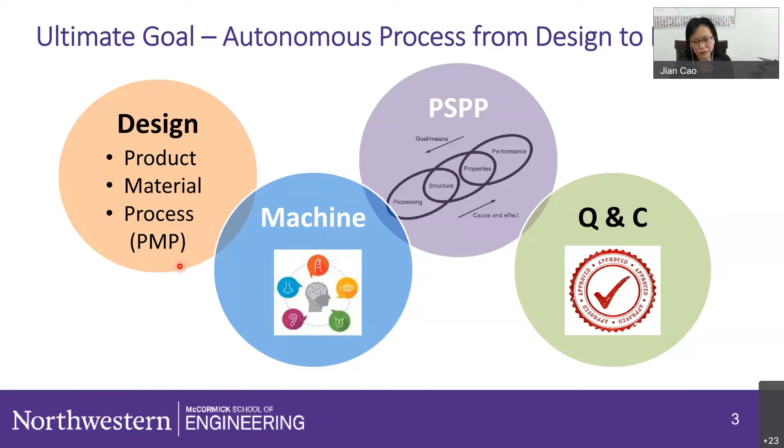As mechanical engineers, we add the machine component, because we want to be able to control the process well, so we need to understand that. That's why we want to have our own machine with open architecture, so we can tweak and measure every possible part. Ultimately, you also want to have a design—here we are thinking about integrating the design of the product, process, and material together, which is really challenging because of computational cost, and this is where machine learning starts to come into play, so you'll hear some of that. And then, finally, you need to know how to qualify and certify the part you made.

Overall, when you connect all these things together, it's through the simulation and data. So today I'm going to give you a glance about what we have been doing.

Starting with the machine, this is our own homemade DED machine, we call it ARPI. Basically you have the laser power, and then you have the coaxial nozzles for powder depositions coming in, and you monitor it with the infrared camera, as well as different hoppers, so we can control the powder flow rate, and also the environmental chamber, so we can process materials that are probably a little bit more reactive.

I'm not going to go through the application of the DED, because at this point I think people are probably pretty well associated with those processes. What's new is actually the first installation.

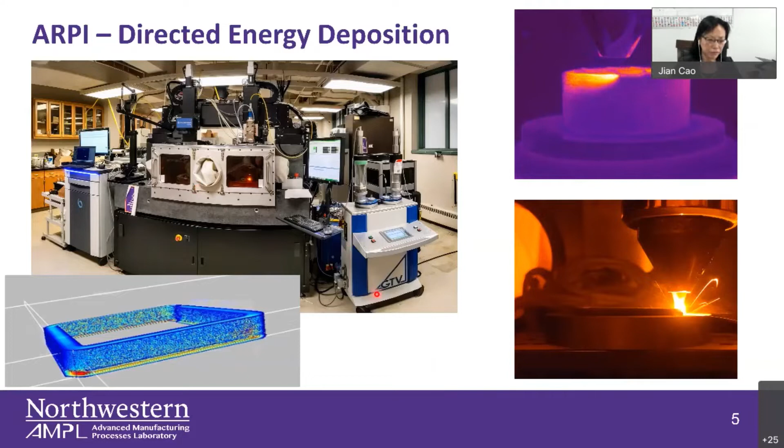The in-situ monitor is called a high-speed spectrometer, it's the Sigma Labs system, right here. That's the first installation for DED worldwide. So I'm going to show you something in terms of what this can do.

Basically, when you look at the high-speed spectrometer, it has very high data acquisition, 100 kilohertz. It can measure intensity, and also two-color pyrometers, so you can measure the true temperature.

So here, for example, I'll give you a glance about what you can see. If you want to make an airfoil, you can see the intensity as well as the melt temperature measurement coming out from the top.

The nice thing about this is really the high resolution in terms of both temporal and spatial resolution. Spatial resolution, you can go down to 6 micron fine details. Compare that with the IR camera, you won't be able to have this kind of 100 kilohertz rate.

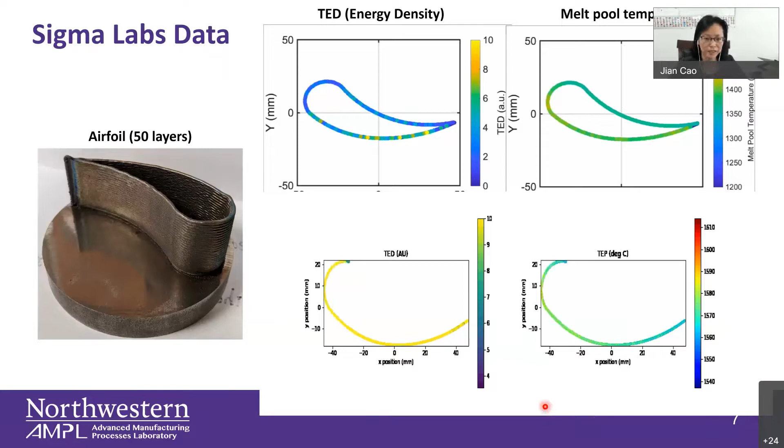What we are trying to do is utilize this to understand the process, material properties, as well as try to control that. The other thing we have been doing is also understanding how the porosity actually formed in the DED, and meanwhile, trying to control the porosity.

This is the X-ray imaging, high-speed X-ray imaging, and the frequency here is 80 kilohertz. Because of different density from the powders, fluids, and solids, you can see the boundary right here, the melt pool.

X-ray is looking here in this direction, the green direction. You can see that this is a really, really violent process, you can see the powder coming down, flowing out.

The porosity was also coming from the powder itself, as well as lack of fusion, or other kinds of mechanisms.

I'm not going to talk too much about this, but the key point that we have found in the past is that the solidification rate also determines the porosity shape and distribution quite significantly.

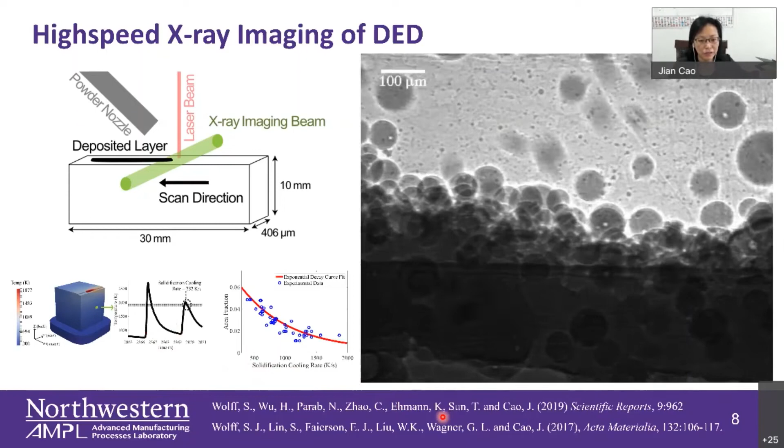So let me talk about the PSPP part. I mentioned about the machine, and when you look at this, we know the thermal history really determines the microstructure and therefore determines the mechanical properties.

Here you can see the image, our image, we are making a kind of metal wafer. You can see the internal structures right there.

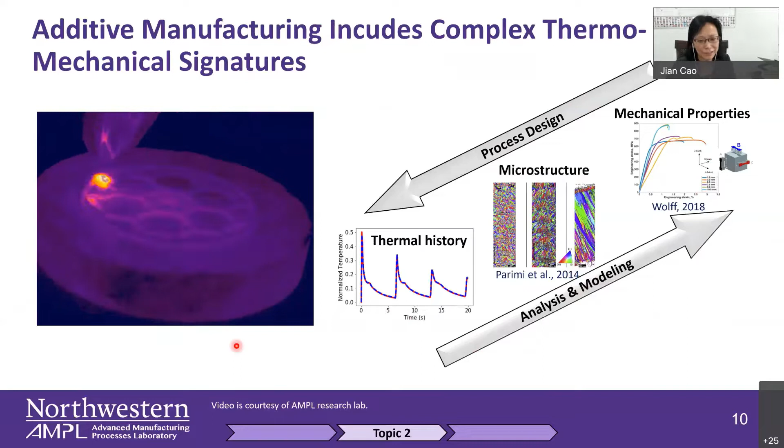But the key point that we want to do is to see how we can control the properties. So you have the nozzle coming down the wall, and one of the first works that we have done is basically looking at the IR camera.

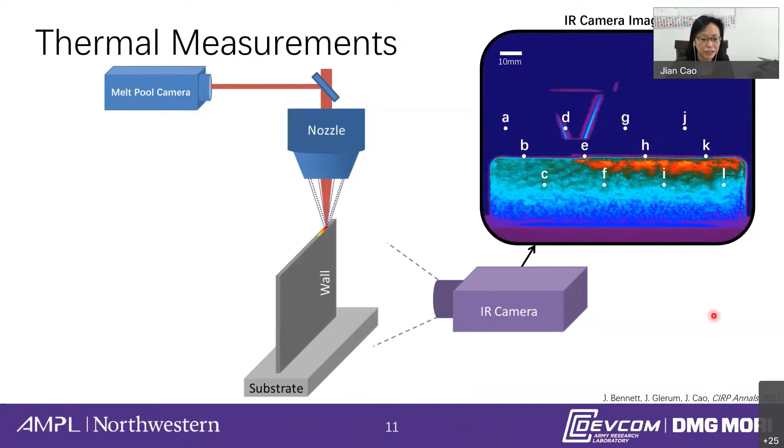And then you can take out, cut the samples from the single wall, and also look at the correlation.

So that setup is relatively easy, and you can see the temperature readings at different points.

As you build up, you can also see that the top ones, which are the red ones, actually, even though you use the same laser power, because of the heat accumulation through the build, you're going to have overall higher temperature.

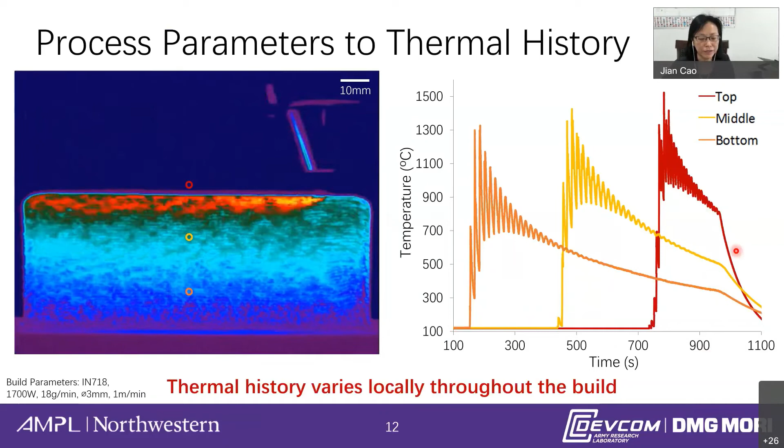For this one, we actually did four different walls, in collaboration with DMG Mori: an 80 millimeter wall and a wide wall, and also the wide wall with the melt pool control from the top.

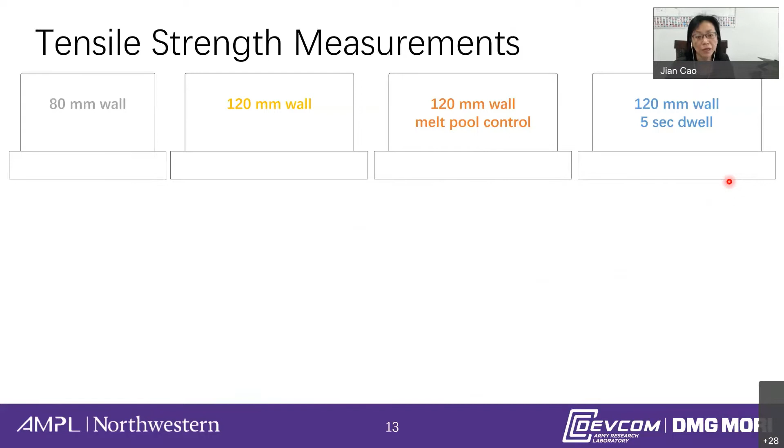For this one, you are changing the laser power, trying to control the melt pool size by looking just from the top. You also have the dwell time, certainly trying to homogenize the temperature distribution through the build by giving a little bit of dwell time after each layer.

So you do the tensile test. That's easy, just takes time.

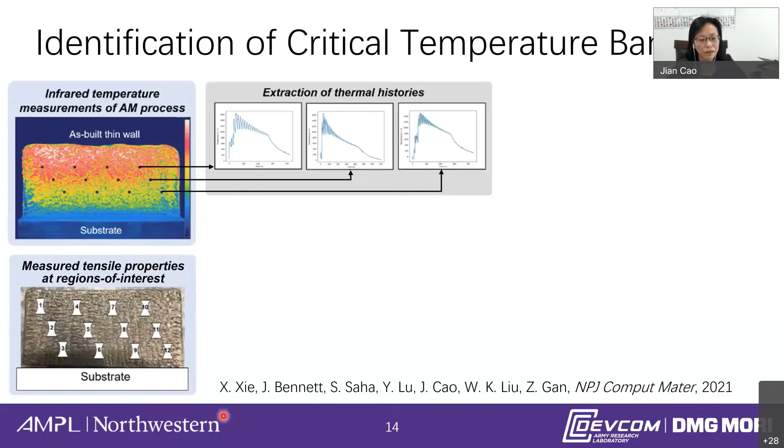But then we actually try to understand what's going on, the physics of this. The first period right here corresponds very much to the solidification area, and as you can see, the numbers are very close. The second one is also very much close to the standard heat treatment temperature for this material, which is Inconel 718.

So it's interesting in the sense that we know from previous studies the solidification range is very critical, certainly when you think about grain structure as well as porosity buildup. But the other interesting thing is this zone that you spend at the lower temperature range, which actually corresponds to material microstructure evolution as well.

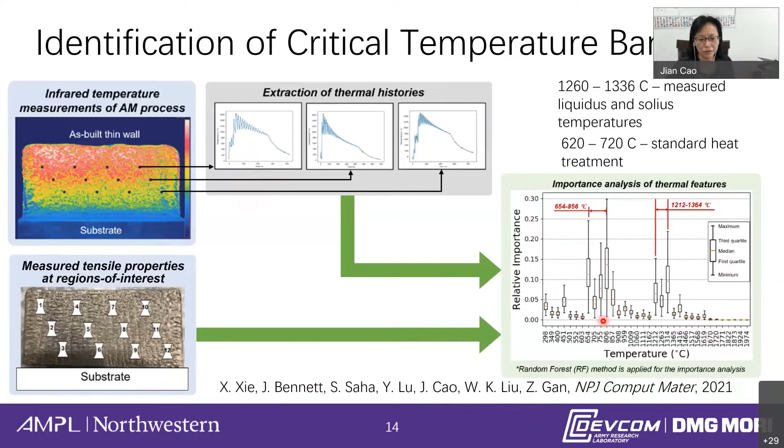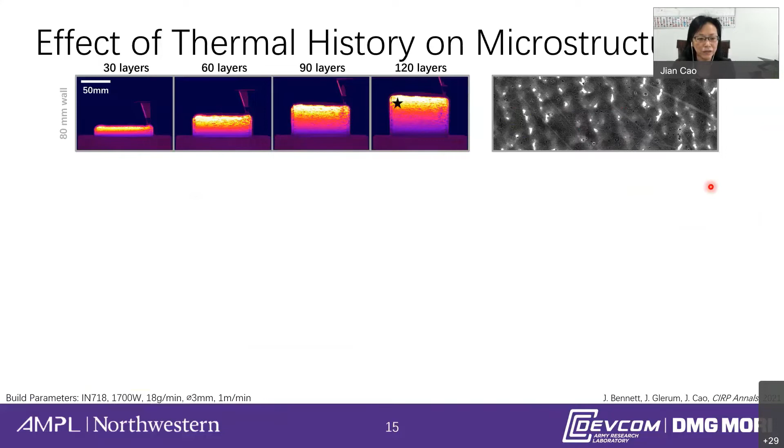So let me give you a little detail to look at the micrograph. If you look at, for example, this 80 millimeter wall at different build heights, this is the micrograph, and I'm going to show you all of this and talk about them collectively. You can see that the spacing here is closer, which corresponds to the higher solidification rate.

This solidification band drives the grain size, and therefore you have much finer microstructure with a faster cooling rate because you allow the material to cool down much more rapidly.

The next thing you observe is the difference in the amount of the laves phases which are nucleated during solidification. We know that the laves phase is detrimental to tensile strength. So you can observe the difference also in how the delta phases come out from different thermal histories. These delta phases correspond to the second band I mentioned earlier, because that cuts through the laves phases and actually strengthens the material.

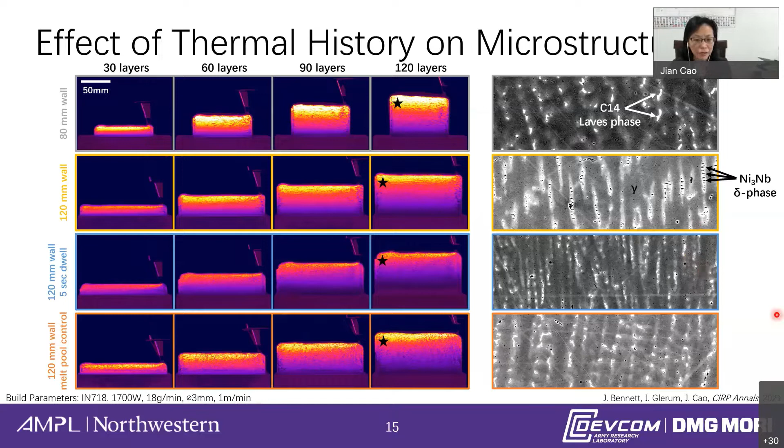So that's why the second zone is also very much affecting the mechanical property. Knowing that, the rest of this is pretty straightforward, because we know this critical time zone is important. So let's see how we can use that to determine the yield stress as well as the ultimate tensile strength. You can actually develop the correlation, analyzing and having a strong correlation to predict the ultimate tensile strength and yield strength based on these time zones.

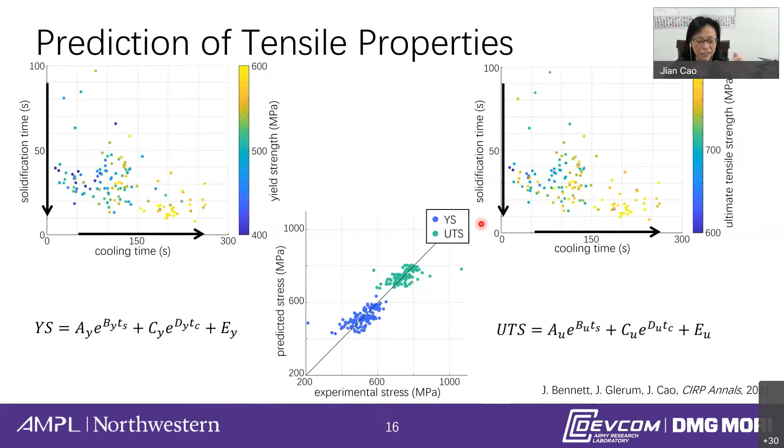Okay, so the next step, what we want to do, as I mentioned, is design—how do we design the process? The first thing we know is that the thermal history is important. In order to have a better design, we need to be able to predict the thermal history better. And as you know, when you do the DED, every time you make the material at a point, if you really want to simulate this kind of fine detail locally, it's very expensive.

So first of all, we developed what we call the gamma code internally. Basically, it's a thermal code to simulate the DED process. You can see the governing equation here to look at the thermal behavior of the DED process, and this is actually, if you look at it, very much similar to a neural network. Because we have this time dependency, naturally you will think about using a recurrent neural network to predict the thermal history behavior.

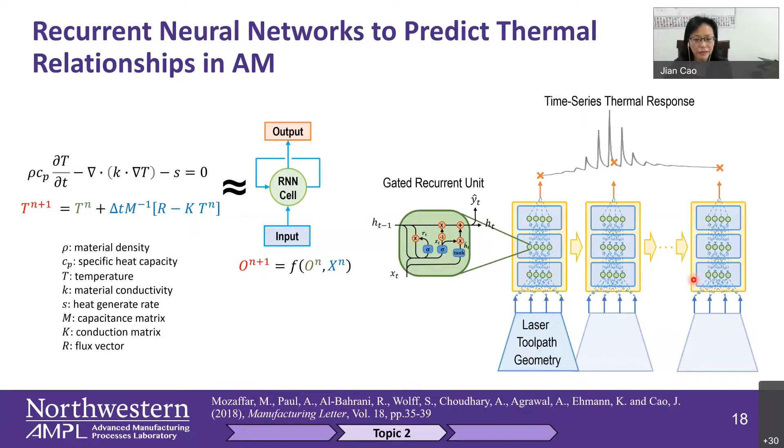So we use gated recurrent units over there to put in the laser toolpath. This was some time ago, like 2018, I believe—yeah, it's right here, so almost 4 years ago now. When you look at this, basically we use the gamma code, as I mentioned, to train the network so that we predict the thermal history.

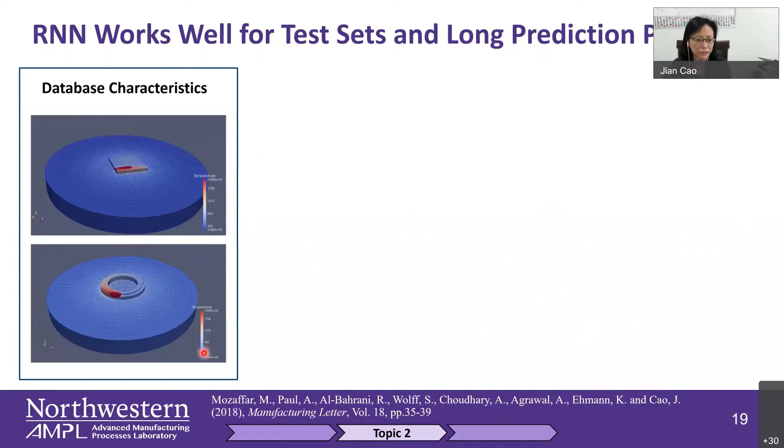So the goal is if we can predict this in a much faster way, then we can use it for control. You can see that it predicts pretty well. It's not just predicting well at the beginning - the initial 20 seconds we use for training - it's actually reasonably well even if you extrapolate a bit, and for neural networks extrapolation is always a danger.

The reason it can do well is because, first of all, the geometry is much simpler - it's just kind of 2.5D. Therefore, the physics you captured in the first few layers still exists for the following ones, so you can actually extrapolate a little bit.

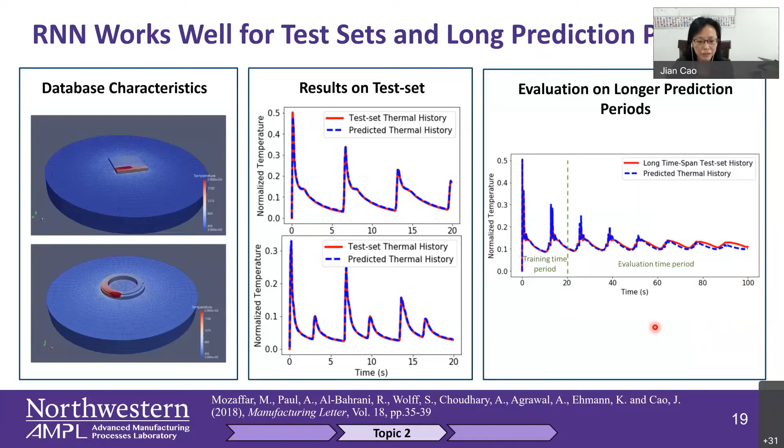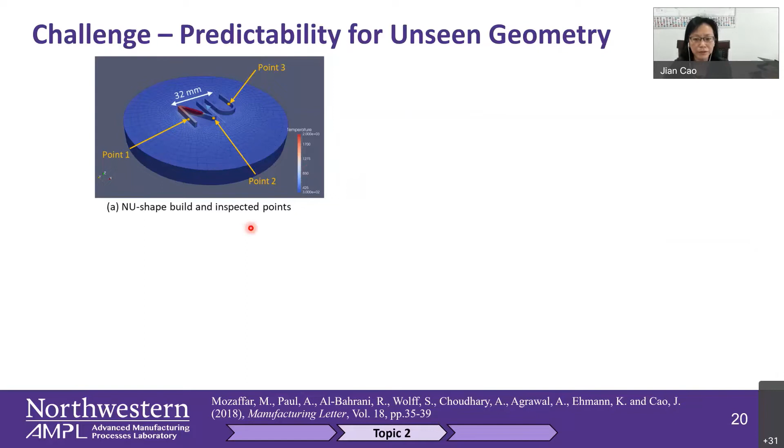Now, as I mentioned, this training was on simple geometry. Therefore, if you want to make something new, like what we tried with an NU-shape, and you look at the thermal history at three different points, two points are pretty well - the straight one, the curved one. But the part with the transition point isn't very well predicted, and that's because in terms of the training data, we just don't have this kind of complexity.

So the next step is how do we generate this to include more general geometry such that we can predict more general, genuinely different builds.

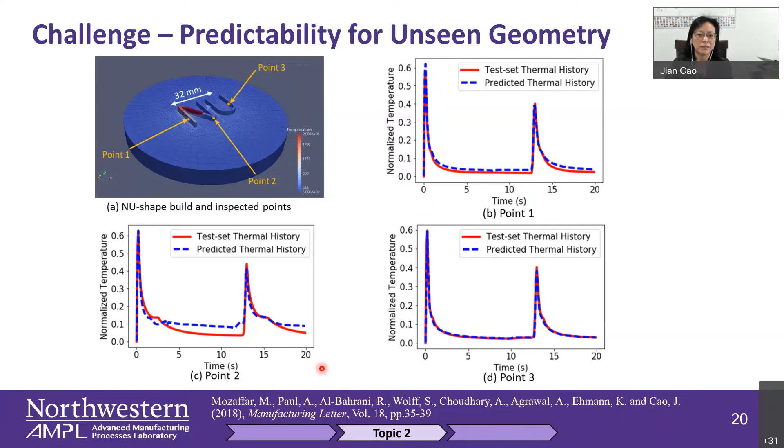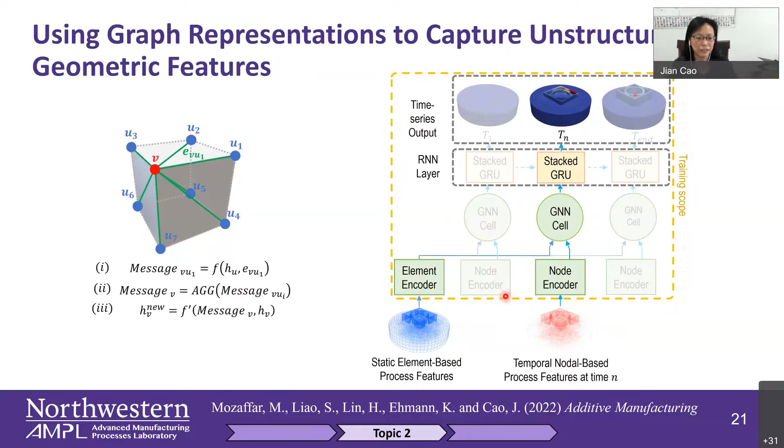So when you look at this, the idea came out with a graph neural network. If you think about the graph, it's very much similar to FEM, and basically if you have the CAD file, you know the connectivity of different parts of the geometry. So we use a graph on top of the RNN I mentioned earlier, and use that to build up the new network.

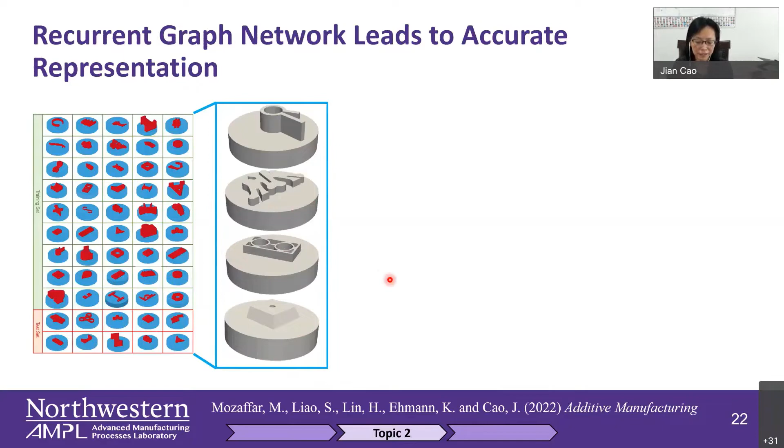So the training data - here are the training sets, the green ones - and you can see we're trying to get different geometries. Some of this is actually embedded right there, so it's much more complex than the previous ones you've seen earlier. We also try to build small ones, bigger ones, different sizes. Once you do that - this was recently published, early this year, 2022.

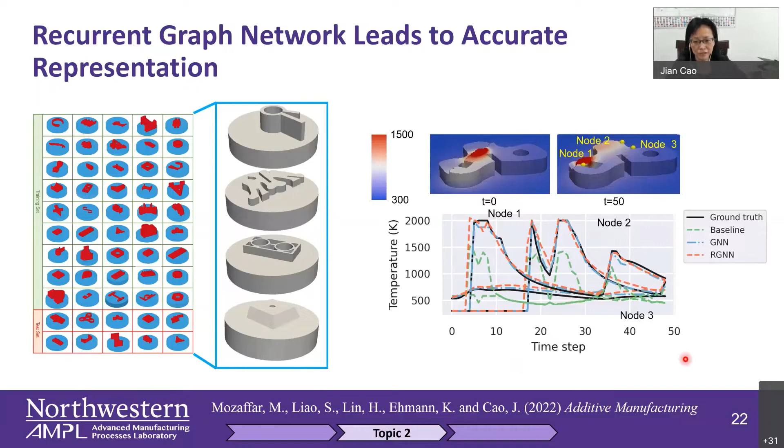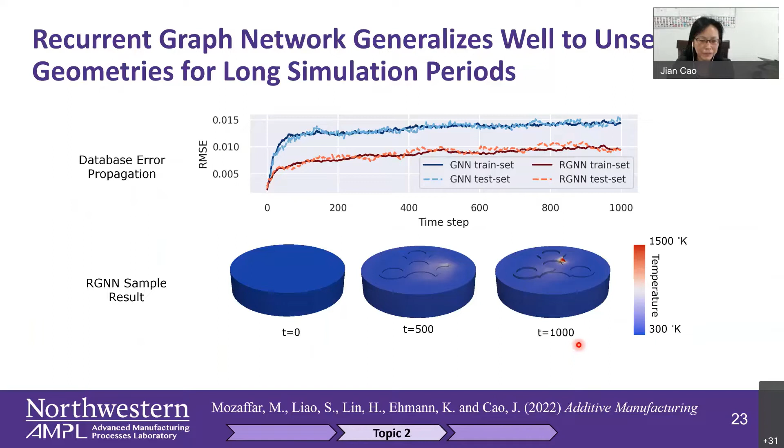So with that, the next question is, remember what I really want to do is control. There are two parts I'm going to show you. One is what we call simulation-guided process control - how do we use a simulation to design the process parameters? In this case, we look at the laser power.

One way to look at that, as I showed earlier, that people have been doing, is to look at the melt pool from the top using the infrared camera and use the melt pool length, the right size. But as we know, when you build up things, particularly looking at the microstructure - which I'm not going to go into details on right here - the melt pool depth also matters. From the simulation you can get that kind of information, not from the IR camera experiments.

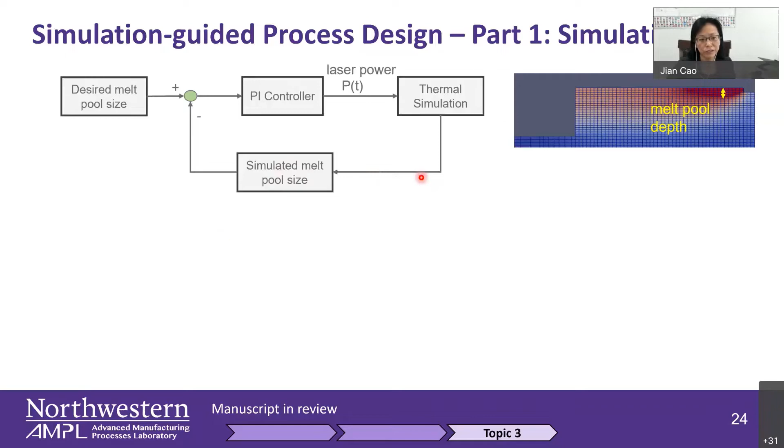So the idea is to use a simulation to calculate the melt pool depth, and then use a PI controller, for example, to actively change the laser power. So, for example, if we want to control the melt pool depth over the build at a certain height with constant laser power versus changed power, you can make sure the melt pool depth is being kept constant. Otherwise, if you just use a constant power, the melt pool keeps increasing.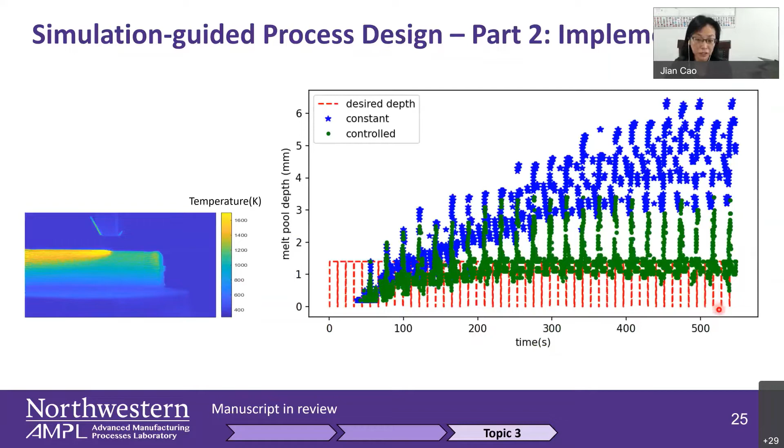Now the next point is, let's try to look at our mechanical properties. So we build a box, and two sides have different melt pool depth control, and you can see that clearly the mechanical properties are very different from these two walls. The other interesting thing, remember I talked to you earlier, here is just about the melt pool depth.

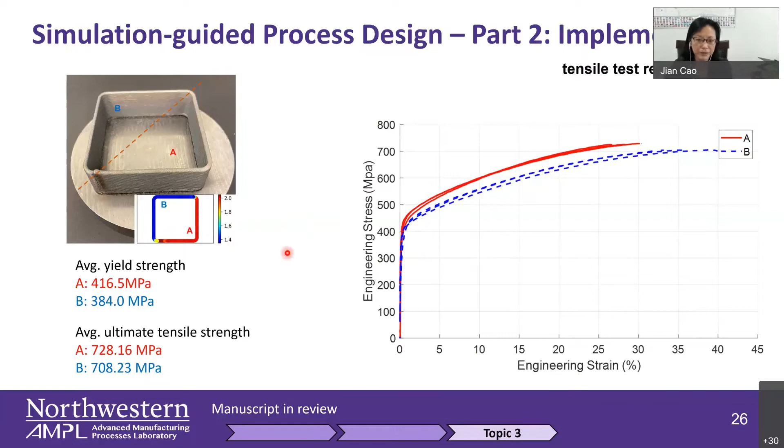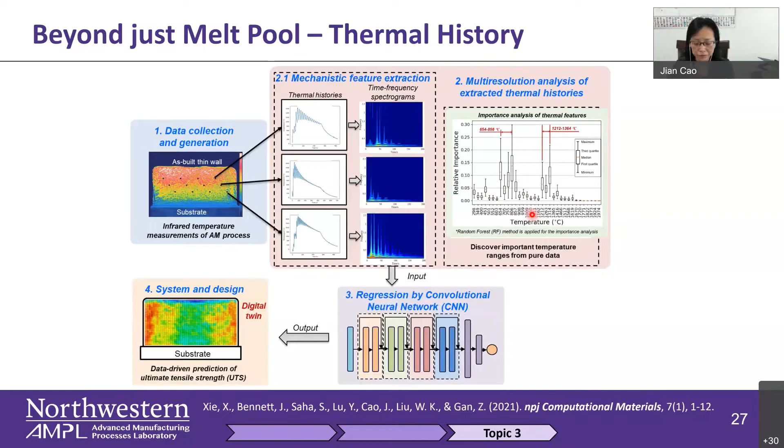But also remember, I told you earlier that the second part, which is the cooling stage, is also important. So the next step is actually how can we go beyond just the melt pool, because the simulation can get more data than that, right?

So this is what we call the second part, which is the differentiable manufacturing simulations for design. Here we basically convert our gamma code into the differentiable simulation code, and link it with the machine learning tools. These days we have a lot of differentiable gradients coming for free, because back propagation gives you the differentiable variables right there. So with this differentiable approach, you can actually do active optimization.

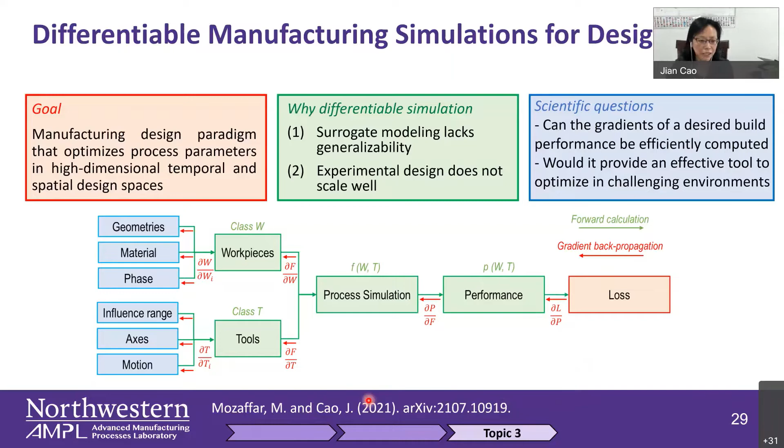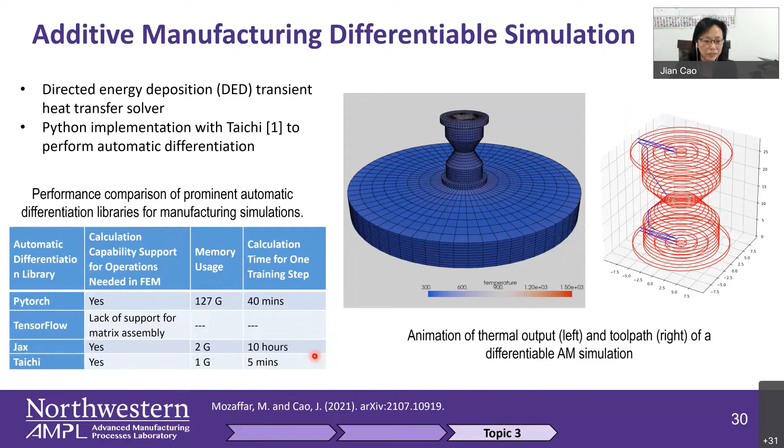So we implement this with Taichi, which is a library, and basically we try different libraries. Some of the common ones are PyTorch and TensorFlow, and we pick Taichi mainly because of the memory usage. It's less and also faster for this particular engineering application, because PyTorch and TensorFlow are mainly for graphics and imaging, and for this engineering application, Taichi turns out to be pretty nice.

So first, what we did is we tried to see how we can control the entire thermal history rather than just the melt pool. So when you look at this, we did a test run, basically to see whether it could converge. And the story of this is that yes, you can converge.

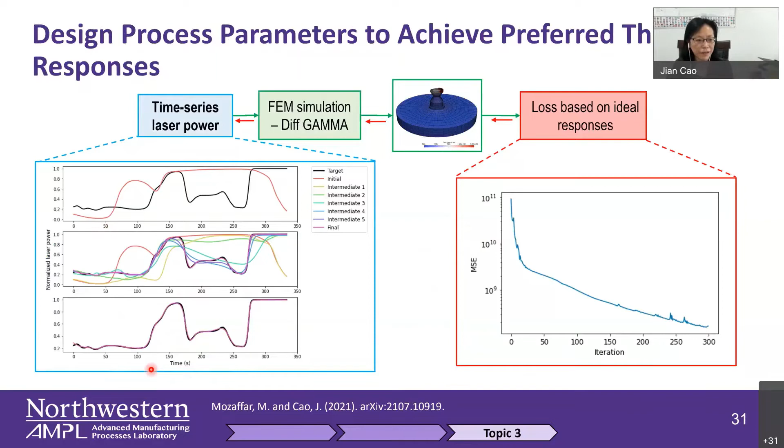And then we said, okay, go back to our single wall, and let's say we want to control this entire cooling time as well from different points. And you can see that the laser power has been changed quite interestingly.

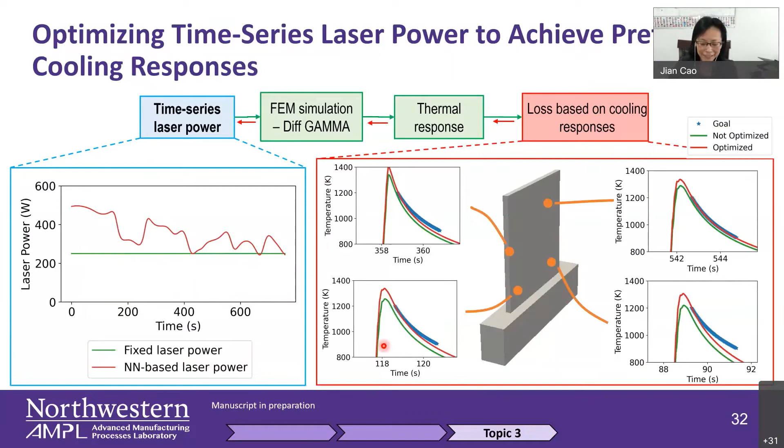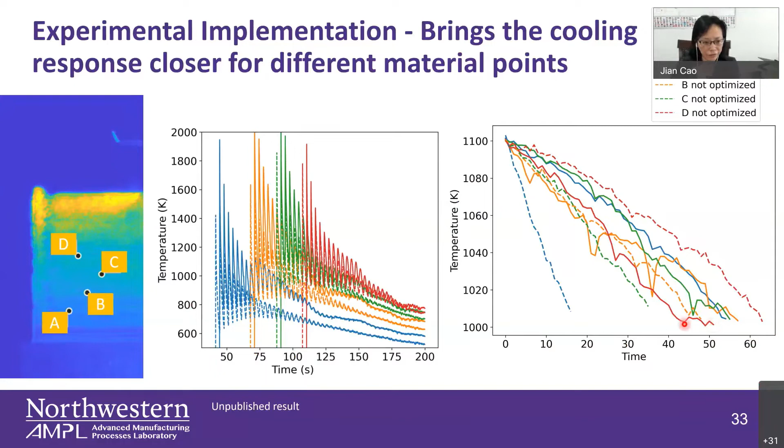And then we implement that into our simulation and into our experiments, and you can see that without that kind of laser power control, just constant laser power, which corresponds to the thermal reading, the temperature reading from these dashed lines, it's very widespread. But when we implement the laser power from the differentiable simulation, you can see that they are much closer to each other.

So overall, I would say this is the ultimate goal, and there's still much more work that needs to be done. Obviously, if we want to control different material properties at different locations, either you want to do it much more uniformly, or if you want a graded structure, or if you want to put some porosity where you want it, for example for bio implants, or other applications, there are just so many different things you can do with this.

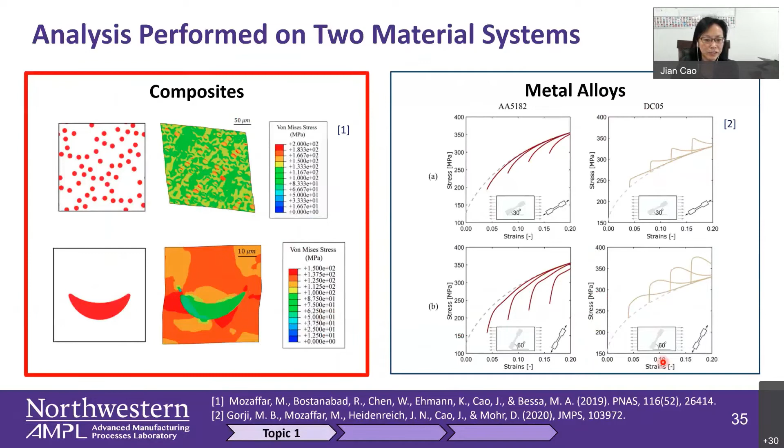So as I mentioned, one of the things which is really important is also the behavior of the buildup. I'm just going to quickly go through this in terms of, once you have the porosities, we also check how we can use deep learning to predict the plasticity. This one was actually published a number of years ago, in 2019, in PNAS.

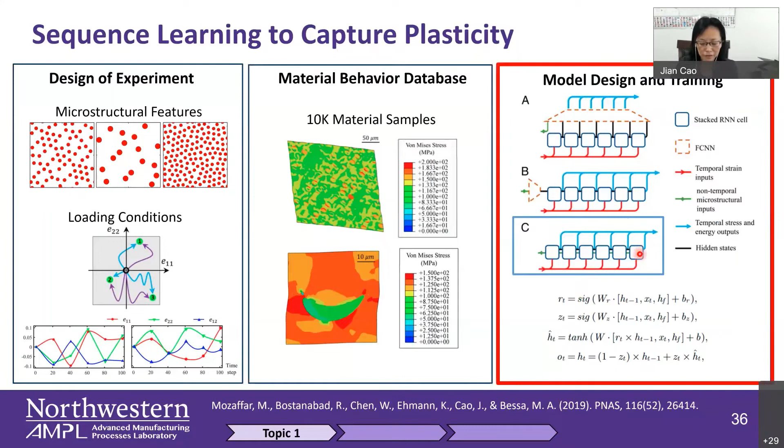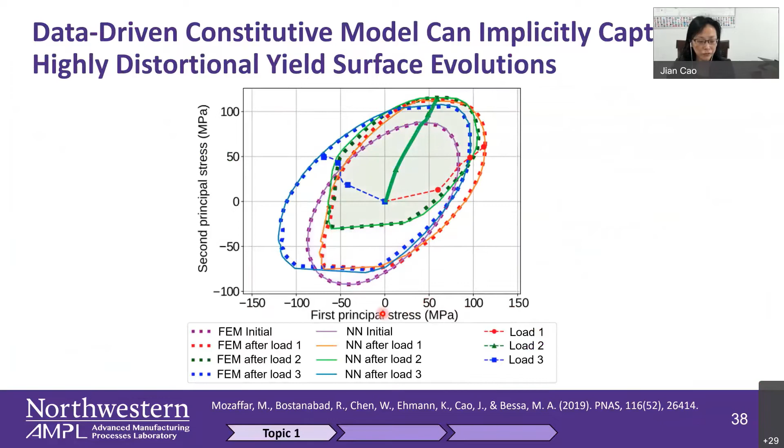Basically, yes, the answer is yes. You can use a deep learning tool and train it to predict, for example, let me just show you the result due to time constraints, since it's a little bit older already. So what we could see is that it can capture the yield surface evolution without explicitly specifying some of those limits. And if you have a different porosity, you can also predict that.

So that's kind of the research part of my talk. I would be happy to answer some questions before I go to the second part, which is talking about JMPT.

Professor Cao, it's a wonderful presentation. I was amazed by seeing the complexity of the work that your team has done. Just one query from our side: because you are working on the data-driven model and the simulation-based model for the design of the process and all, so when you talk about the simulation-based model, how do you do it in real time?

So what we do is, in the simulation, basically in real time, you have two different kinds of control: open loop control and closed loop control. So when we talk about the simulation-based control right now, it's an open loop control for experiments, because you calculate, for example, what laser power you would need, and then you do the open loop control going into the experiments and do that. You just try to follow the laser power, but you can certainly also close the loop further.

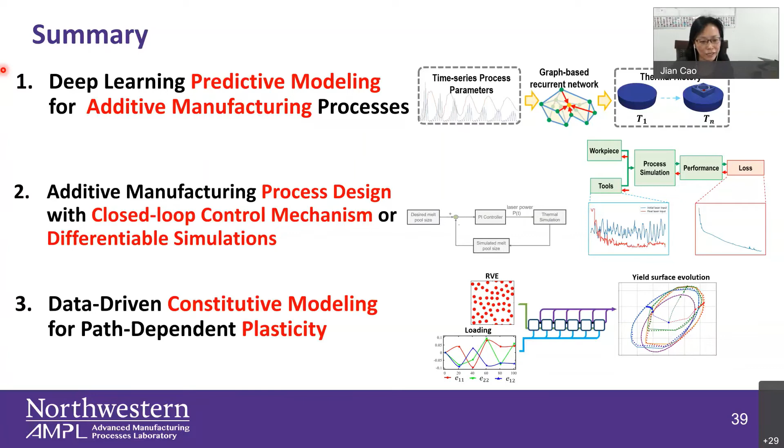So the next part I wanted to talk about is the Journal of Materials Processing Technology. JMPT has been around for quite some time, and I took over the editorship in 2018, and here's our team. So basically we mainly cover additive manufacturing, machining, joining, laser joining or other joining, mechanical joining.

Non-traditional machining, as well as forming, and also some recent addition is casting, as well as some coating, and here's our coating expert. The one thing we don't do too much is purely, for example, injection molding process, because there are lots of other journals focusing on composite, polymer-based work. But if it has certain metal components, for example sometimes you have metal matrix composites, it fits. There's also some recent work where we expanded to silicon-based, not process-wise, but actually post-processing.

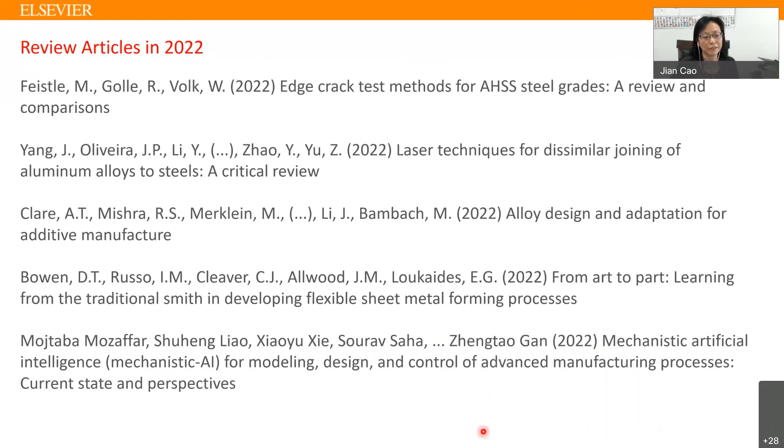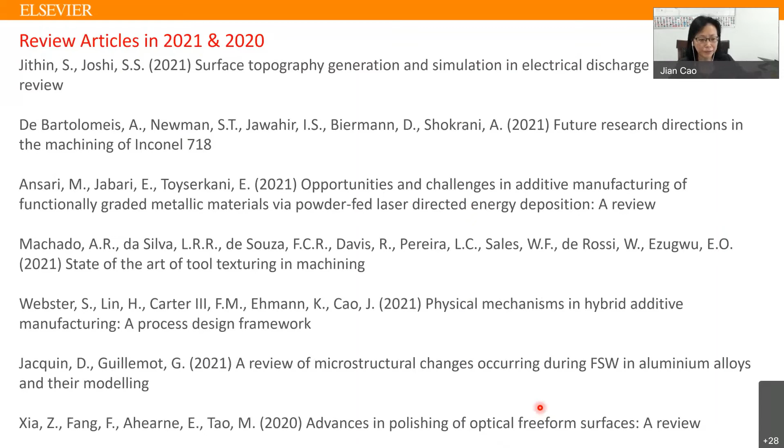This one is on sheet metal forming, and this one is on mechanistic artificial intelligence for modeling design and control of advanced manufacturing processes. For 2021, 2020, I'm not going to read it up because you can search them easily and look at those review articles.

So I would like to welcome people to propose these. Typically what I would like to do is also have people from different regions, Asia, Europe, US, coming together to do a special issue.

Now talking about the individual papers, I will start with the title and the abstract. Because for people, your work needs to be noticed, and the title and abstract is the starting point. The abstract needs to be concise and clearly state the fundamental scientific work that this manuscript is about, and really want to attract readers to read further and ultimately help to get the paper cited.

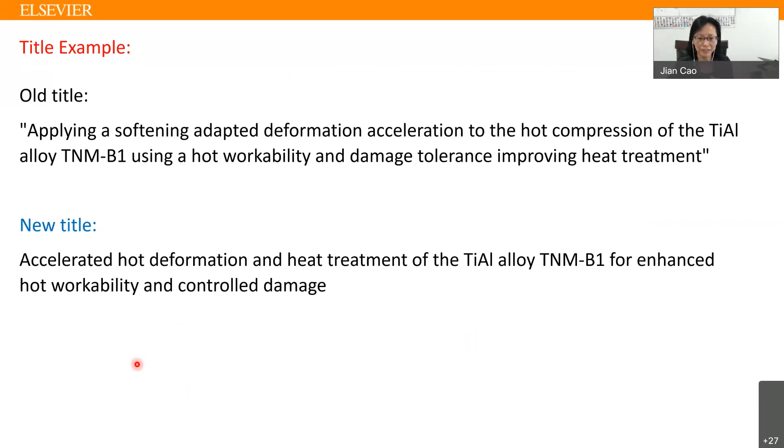Reduce the cycle time and also have better workability. So you see the point, right? The work was good, but the title wasn't good. And also the keywords, please do not be too narrowly focused.

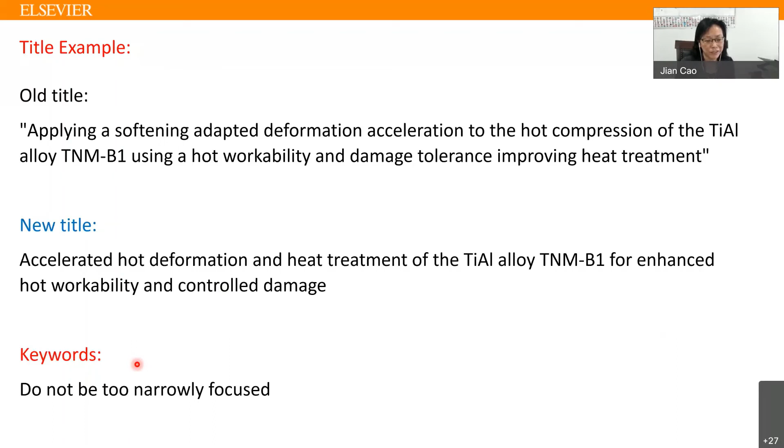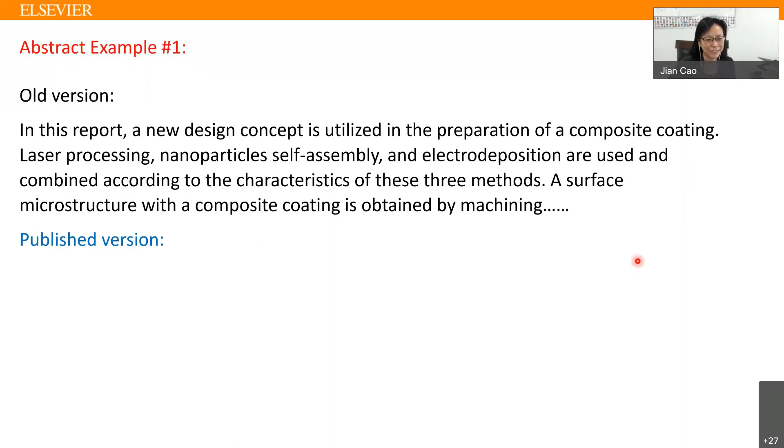Now let me give you an example about the abstract. The first one is the old version. In this report - this is not a report, okay? If it's a technical report, I will reject this. 'The new design concept is utilized in the preparation of the composites coating, blah blah blah, used, and a surface...' It just doesn't sound very exciting, right?

And it doesn't talk about what's new. So the new one says 'a new hybrid process consisting of...' because what's new, that's new, right? You have the laser processing, nanoparticle, and then the laser - why do you want to do this? You say laser is used to prepare this, and the microstructure provides, and you go down to the details, okay? So let me give you another example.

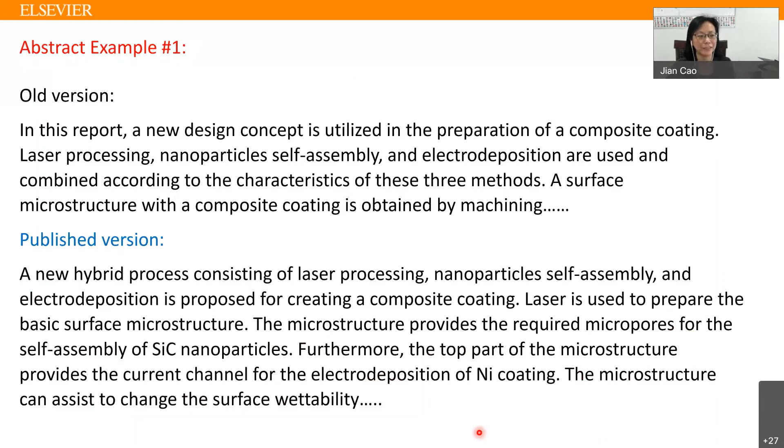The old version says 'the formation and the mathematical model of each geometry are analyzed and the models are verified by experiments.' So what? It really doesn't tell me the details, right? And then talking about the cutting forces. The new one is basically you analyze it analytically, because with lots of work, if you can do it analytically, it really leads to a good prediction and could be used for something else.

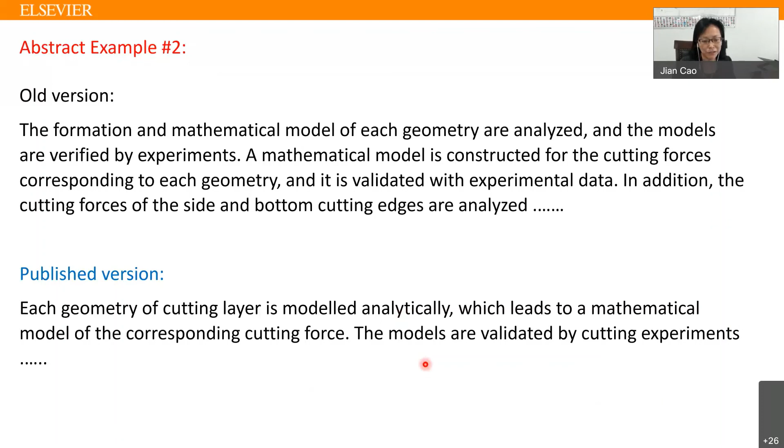So I think if you try to condense it and make it more focused on what's new, that will make the paper more noticeable. And the conclusion needs to highlight what's new, okay? Do not just summarize the work saying I did A, B, C, D, but really try to give a perspective about what's new and also the future work, right?

So with that, I think I'm going to just summarize: quality of the idea, quality of the writing, quality of the reviews, and references. Those will be the key things, and hopefully it will be beneficial. And then after that, you do the promotion of your work.

The key message is that novelty has to be there everywhere. You can't get away without that. That's the first part - quality of the idea. Mere description of the work will not help.

So one of the questions is that you have done the thermal model. The question is which type of software you have used for developing the thermal model, and how to do the modeling of the deposition, like the melting and solidification.